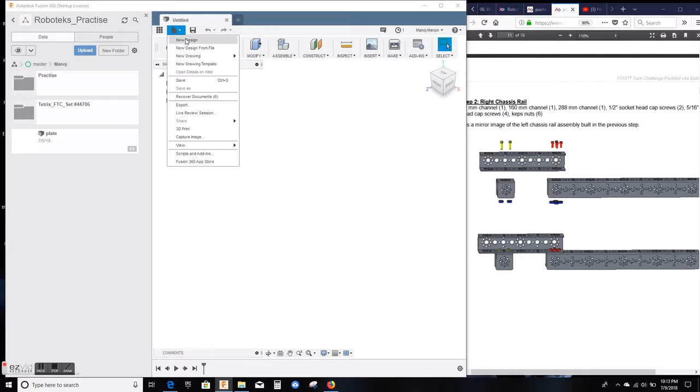If you have other files open, let's click new file or new design. You should see untitled. We're going to save it. Make sure you're in your folder. Give it a name like Pushbot and hit save. You should see that pop up here on your folder, so you have a new file called Pushbot.

We're going to build something like the right chassis rail like you did in class today. So let's get started. Go to the Tetrix folder.

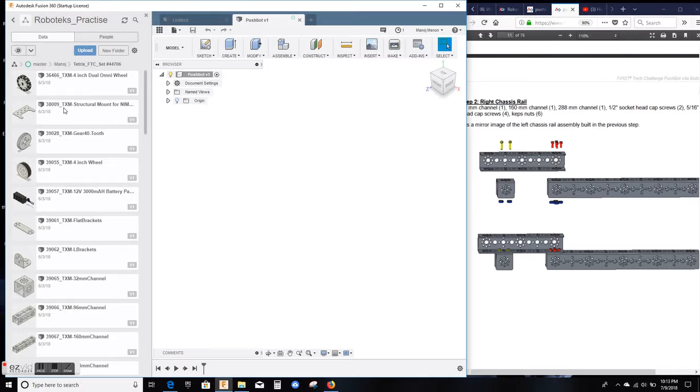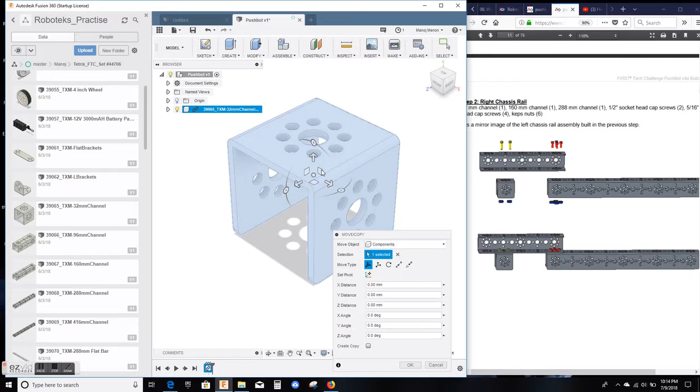And the first piece you want to pull in is this, 39065. It's a 32 mm channel. Let's drag one in here and it should appear on your screen. I'm just zooming out with my scroll button so I can see it better, and I'm going to leave it where it came in, not move it at all. Just hit OK. There, it's in there.

Next we're going to move... this is, no, I take that back. We're going to move 39067. This is the 160 mm channel. So let's drag and drop one over here, and it should show up pretty soon. Again, I'm going to zoom out so I can see all of it.

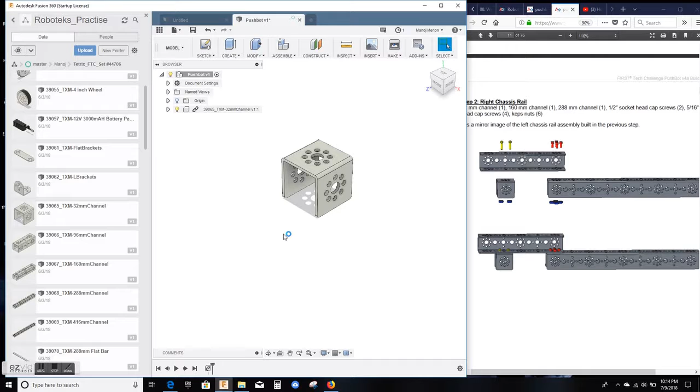You notice it came right on top of the other channel, so I'm going to hold only this arrow. Do not touch the squares or the circles, just this arrow. I'm going to translate it and move it out of the way. Now this is the second channel, and I want it to look like this channel here in the picture in the manual that you were using. You notice that it is actually rotated by 90 degrees. So the bottom small channel is okay.

This one on the top, I want to rotate this and make it similar. So I'm going to hold this small circle on the top over here, because that's what's going to rotate it similar to what you see on the right side page. I just have to make sure that I am rotating it to exactly 90 degrees, and then I am going to leave it. I did this using my left mouse button. You notice it's 90 degrees over here, and now this channel is positioned similar to this one. So I'm going to say OK. There it is. If this was confusing, just go back and listen to the video again and follow along with the video.

So next I'm going to move one more channel in there, which is this last one, that is 39068. It's a 288 mm channel. Move it in there, same procedure. It will come right on top of this one. So again, I'm going to scroll out using the middle scroll button. I'm using the translate handle, or this arrow, to move it out of the way.

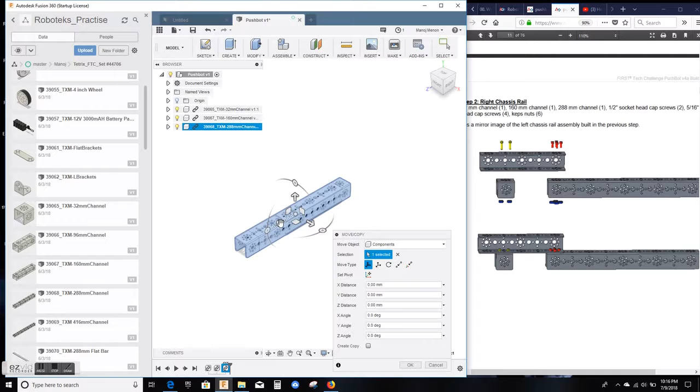In this case, it is in the same orientation as this small channel here, so I'm going to leave it like that and just say OK. Now I got all my three channels in there. In the picture on the right, this channel, the second channel, is actually sitting above. It doesn't matter in this case, because you can do that if you want.

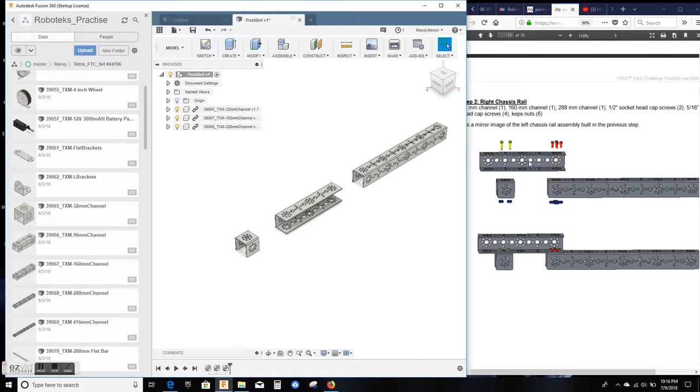But really what we're going to do is just join these channels. In real life, you joined it using screws. We're not going to use screws here, we're just going to define the joint. Remember what I said? It's a rigid joint. The screws make it rigid. That means once you put the screws, the two pieces cannot move independently, they move together. So that's what we're going to do in this example also.

So to do that, we have to define a joint between these two pieces. I want to move this piece and make it attached to this piece in two of the holes. If you look at the picture, these two screws are going to go into this hole and this hole, and on this piece it's going to go in the third position here, so the third big hole right on top.

So this is my third hole on the top. Actually, it's going to be here, on the underside. So this is going to come on top of this, which means it's this hole and this hole on the underside that we have to join.

To do that, we're going to take this command from Assemble, Joint. Now it's asking for two components. Which component should I join? The first one is blue, so I'm ready to select it. I'm going to pick one of these holes, let's say this hole here.

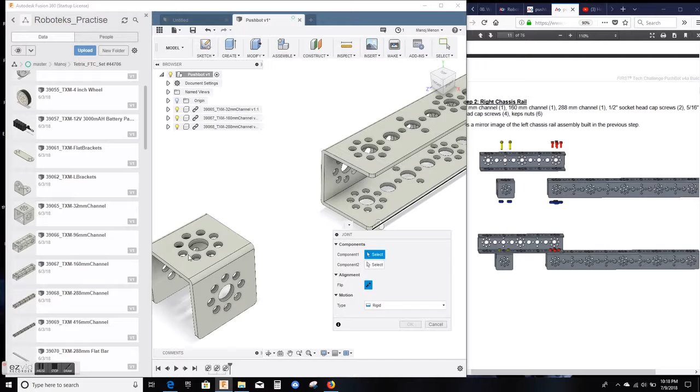I'm going to move this to the center of the screen. Now you can see it highlights every hole for me. I'll zoom in a bit more so you can see clearly. When I go to the edge, it shows me the edge and the center of that circle. That's what I want, either that circle or this circle. If you see the black edge and the center, I want to catch the center.

But when I do that, it starts moving to something else. To prevent that, go to the edge, and once you see the black circle, press the Control key and hold it down. As long as you hold it, nothing else will change. Now you can click the center. So I selected the center of that hole.

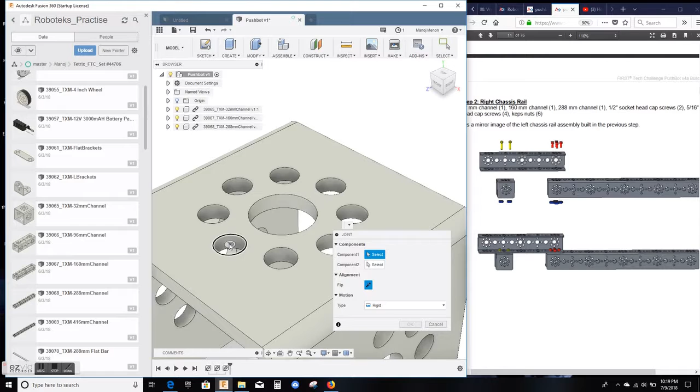I want to join that hole with this hole, but on the bottom side. So I'm going to turn this around. Now I'm ready to select the second component. This is my second component. I just need to find the underside of it, so I'm going to turn this around.

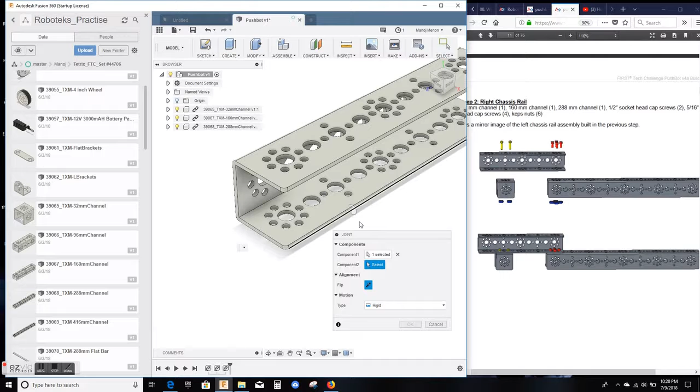Now I'm ready to get my second component. I want it to join to this hole. Again, it keeps moving around when I do this, but if I go to the edge, I see the black circle. I press the Control key, now it's locked, and I can move and get the center. I'll click on the center.

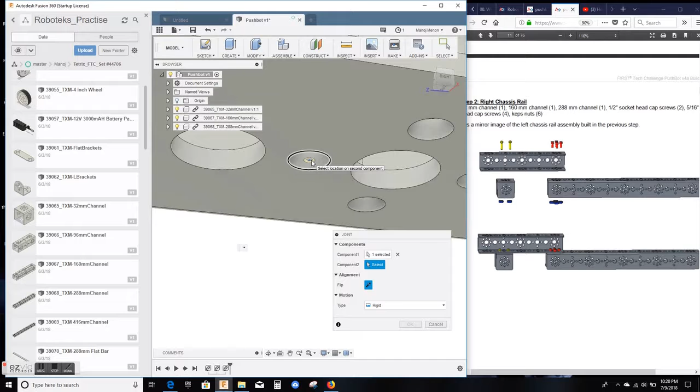Now you see how the two pieces came together, basically making a joint. So instead of using screws, I just defined the joint directly in CAD. Now you cannot move these two pieces independently, they're stuck together basically. That's how it says here, the motion type is rigid, and it shakes when you animate, meaning it's all fixed together.

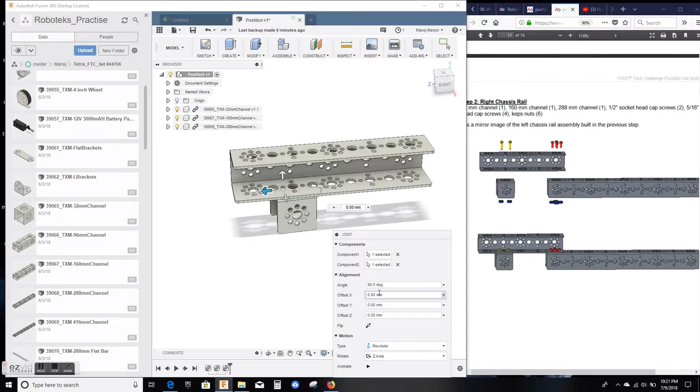If it was not rigid, if it's revolute, it will take those two circles and make a revolution joint there. So you want rigid. When that is rigid, you say OK and done. You have a joint, and now these two parts are fixed. I'm zooming out so I can see the other one clearly.

Now the last one we want to do is you have 4 screws. You can put 4 joints or you can even do just one joint. In this case, one joint is enough. So we're going to do the same thing. I want to join these last holes together, meaning the top of this one has to be joined underneath this one.

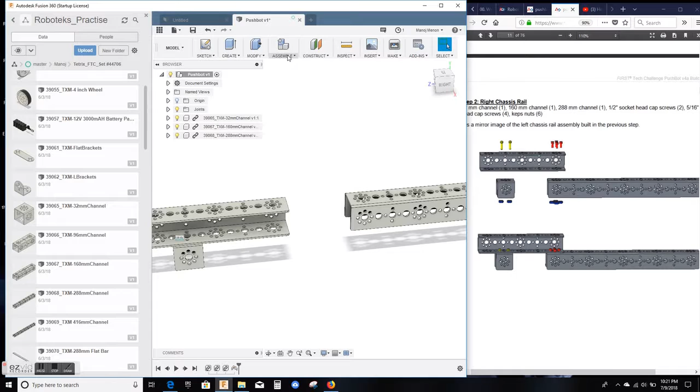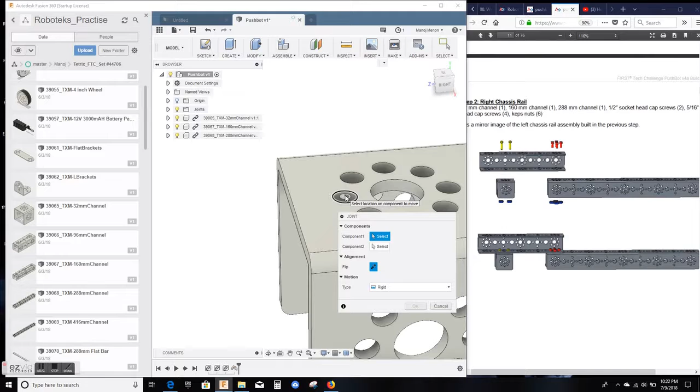So again, let's go to Assemble, take a joint, select my first one. Now I want this piece to move here, so I'm going to select this first. If you look at the 4 screws, they go in these 4 holes here. I'm just going to take one of them, let's take this one. Same procedure: find the black circle, hit Control, hold it, move to the center, and click the center.

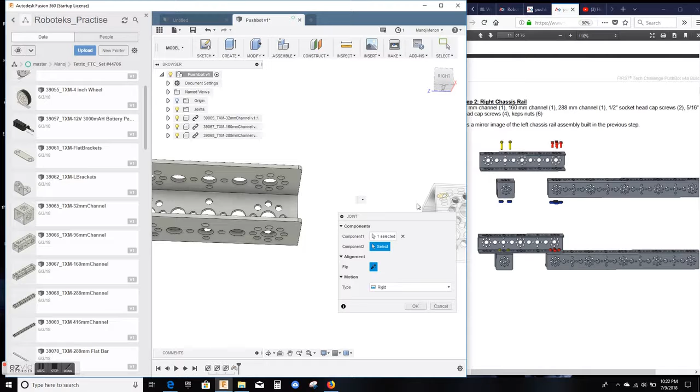That's my first one selected. Now I'm going to select the second one. Zoom out, find your second one. It's actually underneath, so I'm going to turn it around. I want that hole to come and line up with this hole. Same procedure: black circle, press Control, move to the center, click the center.

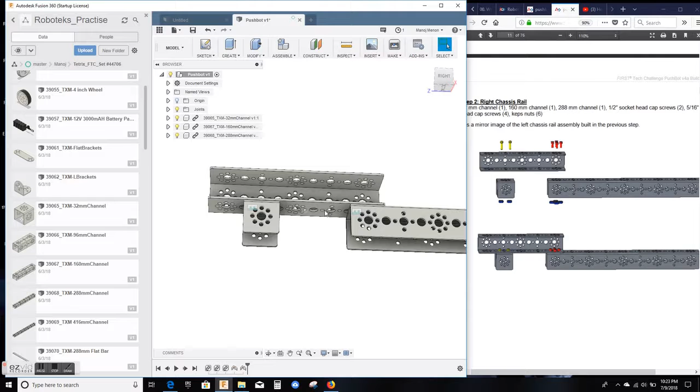There, the piece came together, and because it was a rigid joint, it's done. So basically you have made your first joint pieces. I'm going to hit the home button, it shows me everything I want, and that's how it looks. So, as easy as that.

Hope you understood that, and let's save this. You're done for the first side.